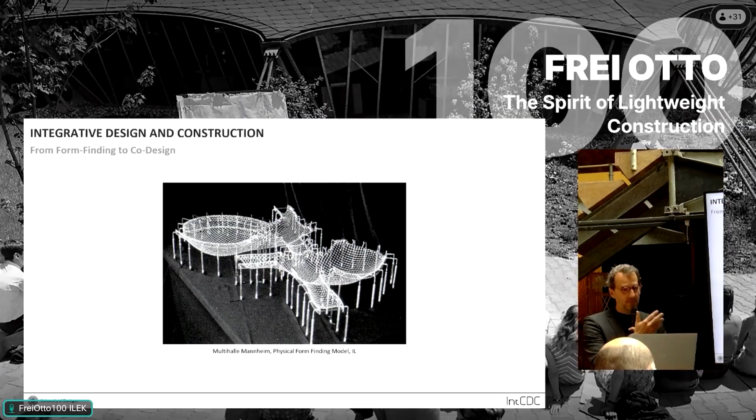I think we all agree that one of Frei Otto's most profound contributions constitutes his work on the design methodology of form finding. And of course, at that time, form finding constituted a radical departure from the design methods that had dominated architectural design thinking since the development of descriptive geometry during the Renaissance. Form finding questions the primacy of geometry and the related methods of form definition, which had been driven by the notation format of parallel and perspectival projections for centuries, thus limiting architects to only being able to design what they could actually draw. So in contrast, form finding as a design method employs self-forming processes to derive form rather than defining it. In the case of the Mannheim grid shell, the famous hanging net model that you all know was used to physically compute the shape of the building.

While it's also important to understand that there was a comprehensive digital model for the Multihalle, which was computed by the former Institute for Construction Geodesy, not the IL.

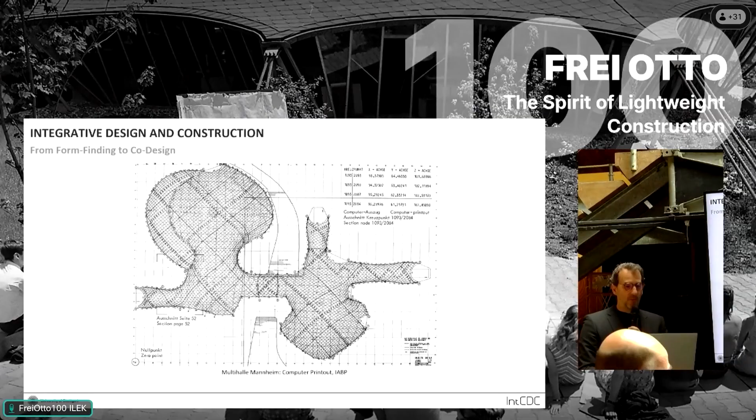The more significant relation to today's computational design can probably be found in the general definition of form finding as stated by IL researcher Siegfried Gass, who said that the characteristic form of an object found in each case is the result of the organization of matter in space, the joining of individual parts to form a new whole according to defined principles. In the organization process determined in this way, the parts find themselves in a state of equilibrium. The characteristic form of the object is the expression of these processes of formation.

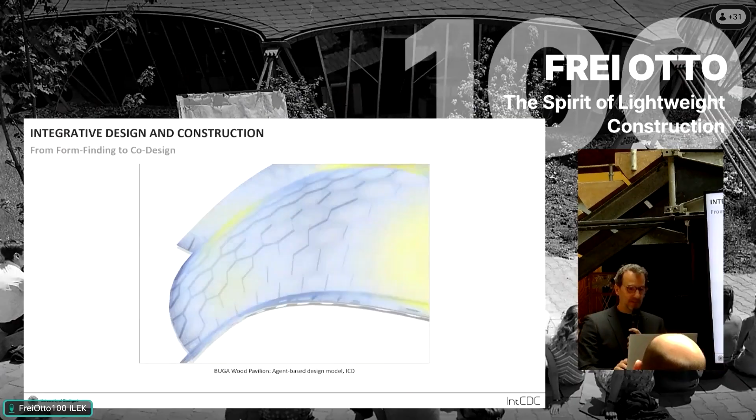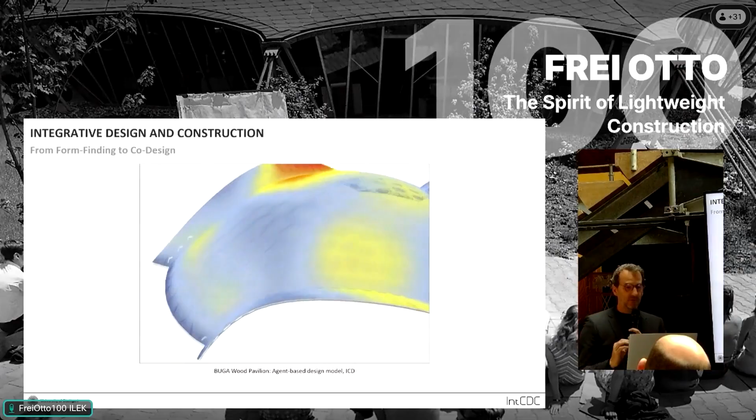Based on this notion, I think today we can again radically extend the design method of form finding towards computational form generation by expanding the principles acting on the model, by integrating multiple design and performance criteria, and by informing the individual behavior of its parts across scales. Or in short, by lending the model's constituents multifaceted agency and the capacity of self-learning in an open-ended form generation process.

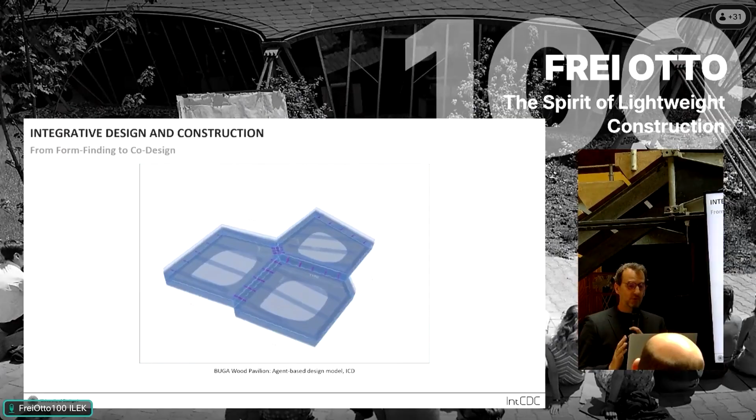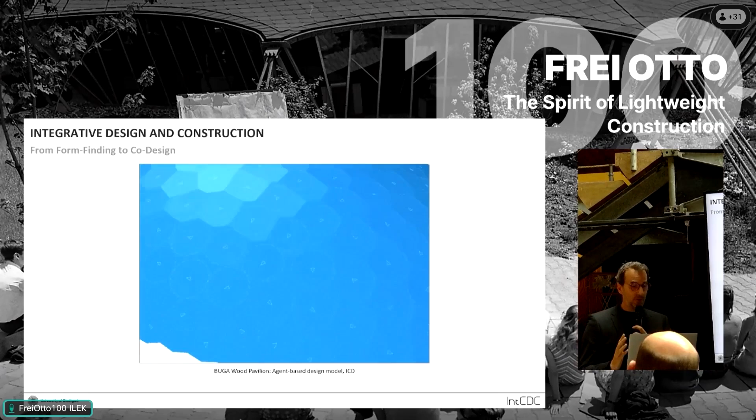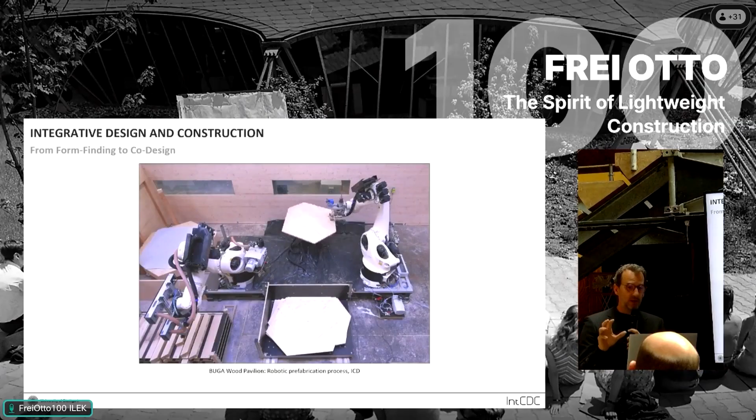I think the profound step forward here is that these design methods remain open to human design steering at any moment in time, no longer rely on predefined ordering systems, and thus generate topology, not only geometry, negotiate various often conflicting design and performance criteria, and directly integrate with and connect to new fabrication processes, which can be developed concurrently and in direct feedback with the related design methods and building systems.

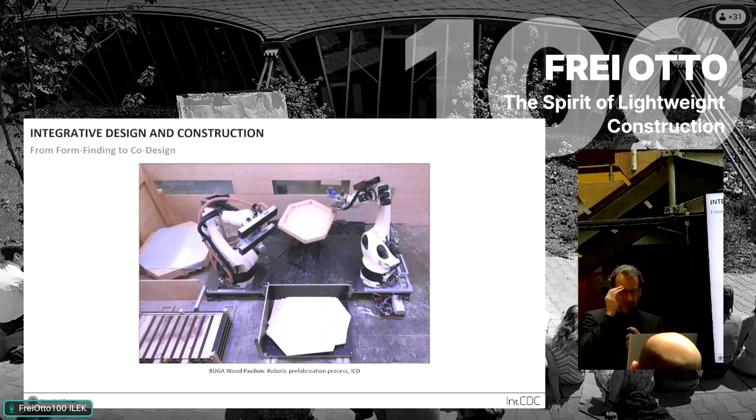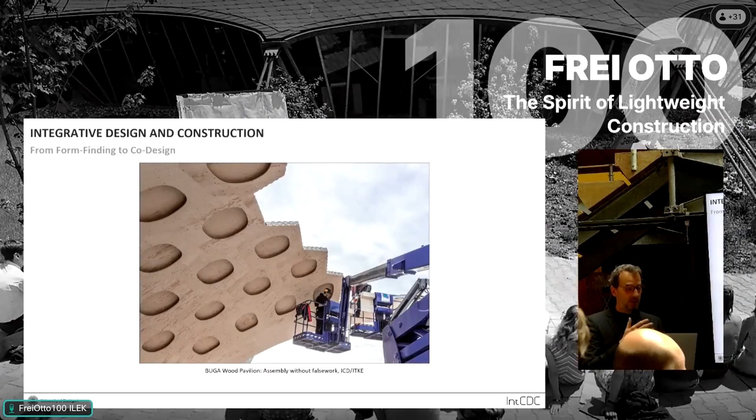So I think this enables the effective production of finely tuned, load adapted, and thus geometrically unique building elements, resulting in novel structural typologies, such as segmented timber shells, which can be assembled like a three-dimensional puzzle in space, as we have shown in the BUGA Wood Pavilion for the Bundesgartenschau in Heilbronn.

So this segmented timber shell is actually only 160 millimeters thick, spans 30 meters, is built from timber only, providing a multi-purpose event space, not only with a roof envelope, but also excellent acoustics and a unique architectural experience.

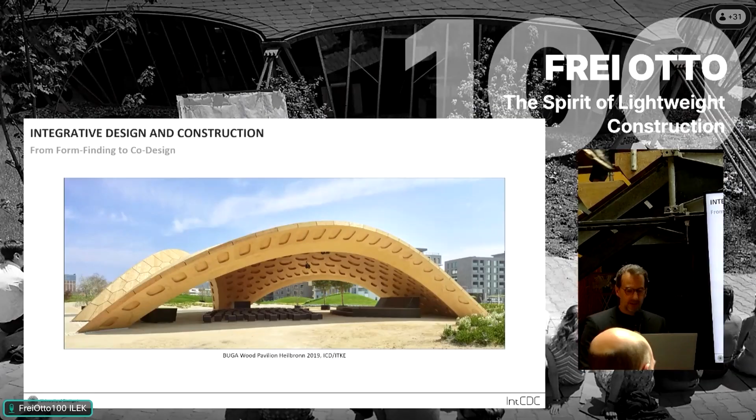In a subsequent project, which is actually a permanent building that serves as an ideas laboratory for the Cluster of Excellence LivMatS at the University of Freiburg, we were able to show that this integrative approach towards segmented timber shells not only results in a lightweight structure, in this case weighing 27 kilograms per square meter for a fully insulated building envelope, but also an exceptionally light environmental footprint, reducing the global warming potential by more than 60% compared to a standard timber building.

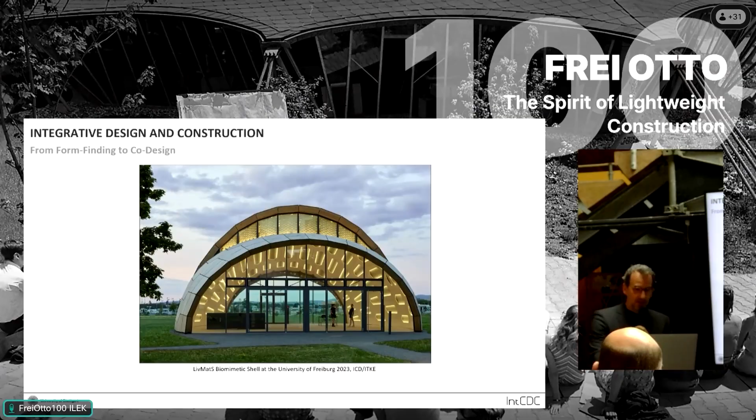So beyond form finding one equilibrium state, here the methodology of co-design concurrently advances the development of computational design and engineering methods, robotic fabrication and construction processes, and the related novel material and building systems to achieve a higher level of integration.

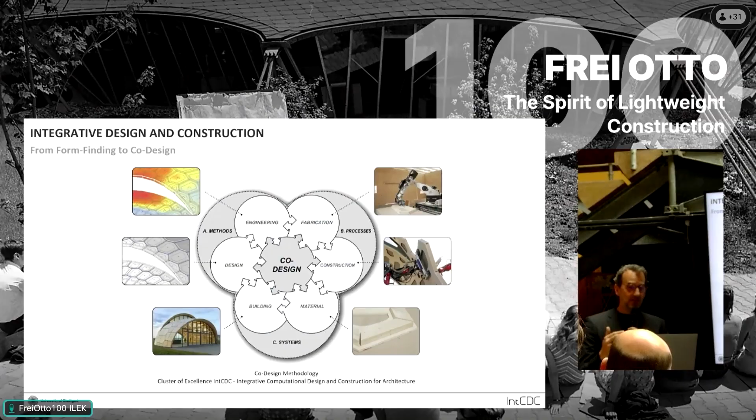In this pursuit of a higher level of integration, of course, biology can serve as a kind of concept generator. As extensively explored in the research of the Institute for Lightweight Structures, in living nature, structure, form, and materials, as well as the related material flows and processes of formation, are always inherently and inseparably integrated. It's interesting to note that fiber composites are the building systems of nature, not pneumatic structures. That's just a side note.

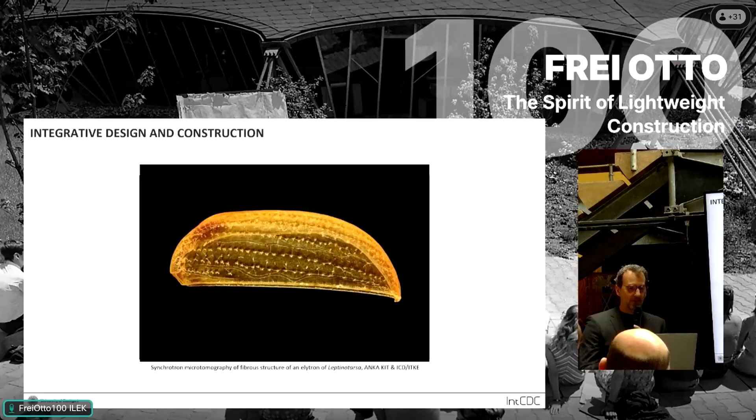Most load-bearing structures in biology are fibrous systems in which the fiber organization, directionality, and density is finely calibrated with the occurring forces. The resulting high level of morphological differentiation, the related resource efficiency, is emblematic for natural structures, of course. But it doesn't follow straightforward rules of optimization.

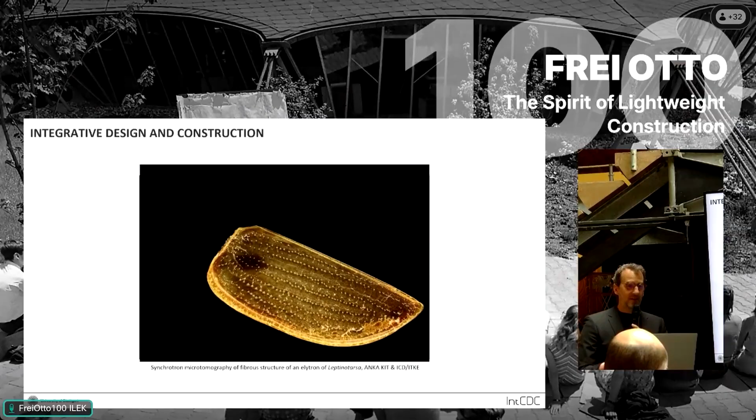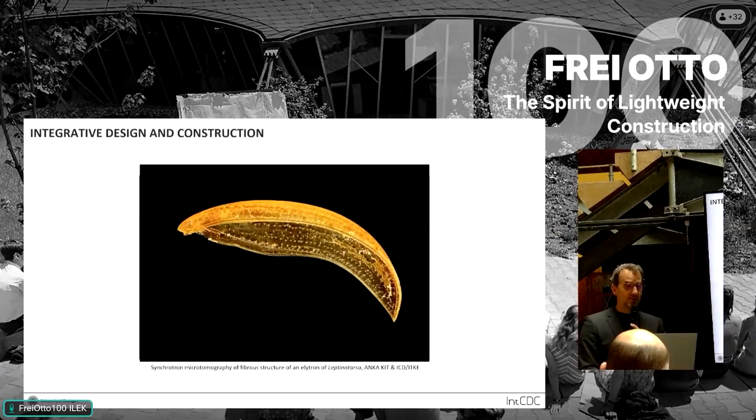And today, with the help of advanced computational analysis, design, simulation, and fabrication methods, we can explore the underlying morphological principles, very often very counterintuitive, of such fiber systems in nature and transfer them to architectural design and engineering through the co-design of related digital fabrication methods.

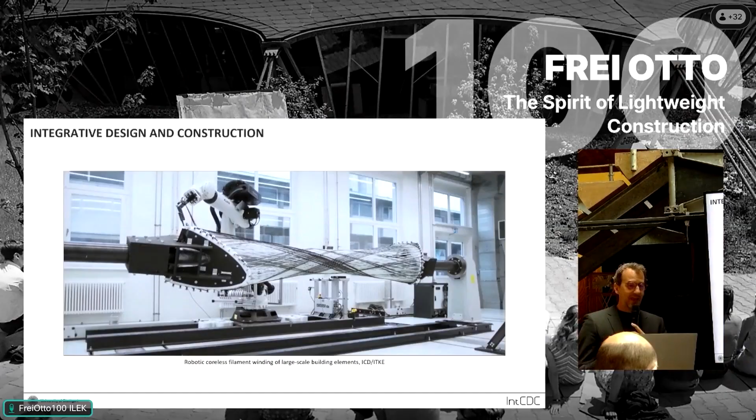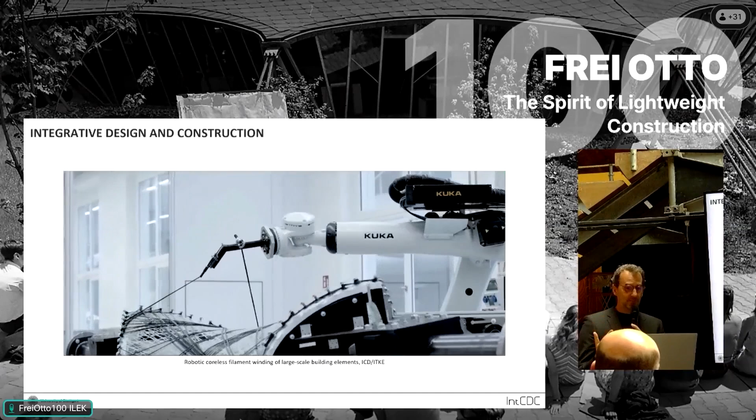So for example, as you can see here, we have developed coreless filament winding as a novel construction scale additive manufacturing process. So here, fibrous elements are freely placed between two rotating winding scaffolds by the robot. And during this process, the predefined shape of the building component actually only emerges from the interaction of the filaments and does not require any mold or core, and in this way also avoids any production waste or material offcuts.

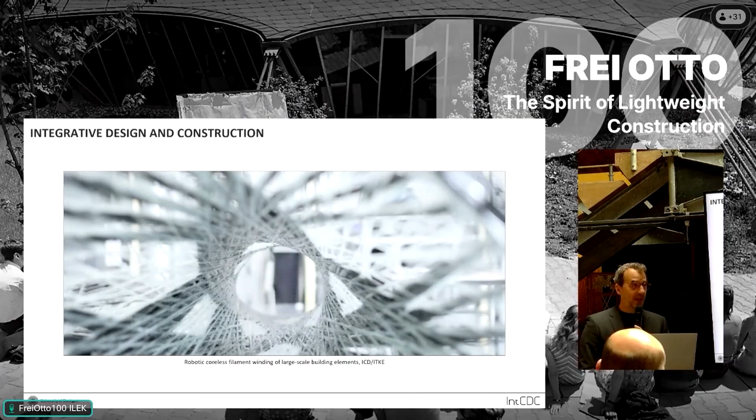So in this way, the fiber arrangement, density, and orientation of each building component can be individually calibrated, performance-tuned, and architecturally articulated, while remaining directly producible. 60 such elements, made up from more than 150 kilometers of fibers, form the primary structure of this Buga fiber pavilion, which achieves a free span of more than 23 meters and is enclosed by a fully transparent, mechanically pre-stressed ETFE membrane.

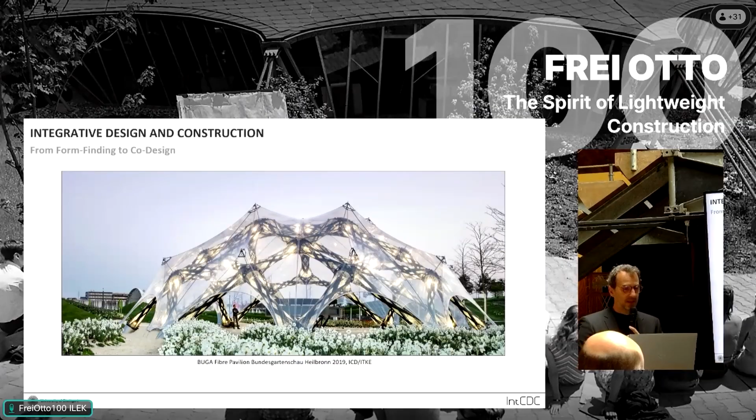With 7.6 kilograms per square meter, including everything, the pavilion is, on the one hand, exceptionally lightweight and demonstrates how combining cutting-edge computation technologies with construction principles found in nature enables the development of truly novel systems. But I think, on the other hand, it's also what one may call a genuinely digital building system. Just something that, without that higher level of integration enabled by co-design, would be very difficult to envision, design, and actually make.

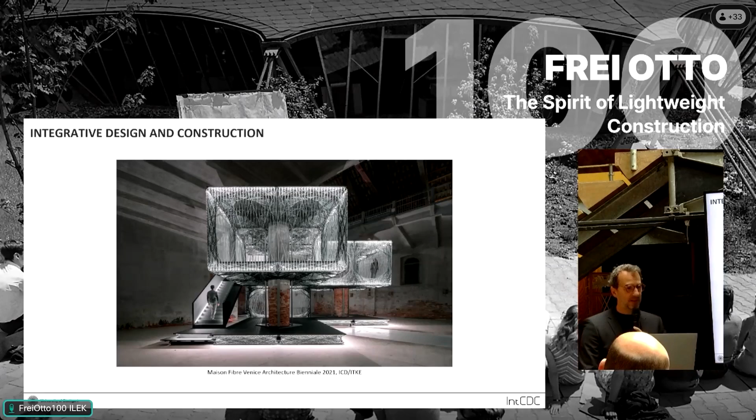We have also shown how these principles of fibrous construction can be explored in the context of multi-story systems. And for example, in our project Maison Fibre at the Venice Biennale in 2021, where all load-bearing walls and slabs were only made from fibers and offered the visitors the intense experience and spatial expression of a highly dematerialized structure, which I think points towards a novel material culture in architecture.

In recent years, we've also done considerable work in shifting from the synthetic filaments, glass and carbon fiber that was used in the Buga pavilion, to natural materials, such as flax fibers, which have actually been used for the production of linen fabrics for millennia, and also used to be a regionally available resource here in southern Germany. In hybrid structures, such as the one we developed for the Flax Hybrid Pavilion in Wangen, the fast-growing natural fibers can actually significantly reduce the amount of wood needed, in this case almost 2/3, and thus address the growing concern of the land-use trilemma relating to natural materials.

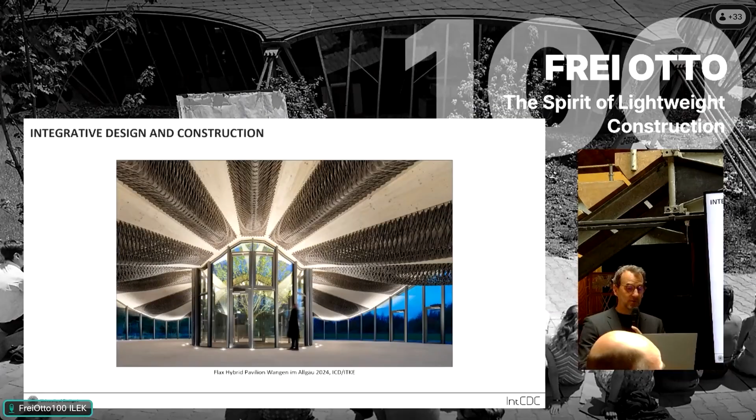I think it's interesting to note that similar to Otto's architectural work, this not only results in effective structures, but also an expressive architecture with a kind of strange coherency across projects. I think this coherency is not driven by the desire to author a particular form language, but the underlying cohesion actually emerges from the strong methods orientation and research-driven approach.

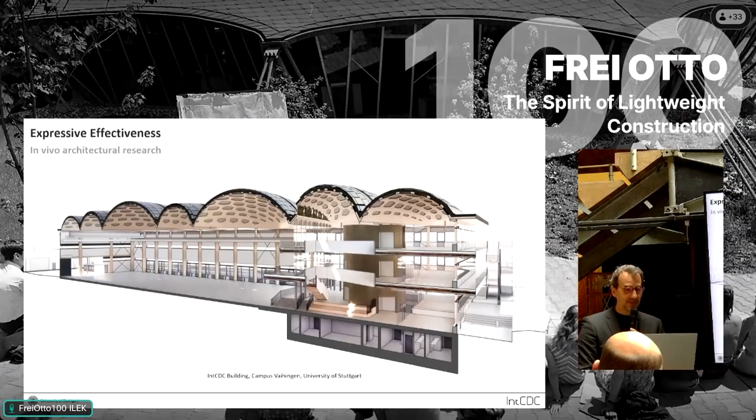In this way, we consider actually IntCDC the construction of buildings based on scientific insights as an important component of what one may call in vivo architectural research. Here, the building is not merely a demonstration or an evaluation, but it's actually a vehicle for research and concurrent two-way knowledge transfer, as you can see in the IntCDC building that will be completed here on campus at the beginning of 2028, just a bit down the road, which integrates the research of the cluster of excellence in a large span segmented timber shell roof, a novel multi-story timber building system, graded concrete foundations and slabs, as well as a large load-bearing natural fiber element.

Now, coming back to the Multihalle, one particularly fascinating aspect of the project is, of course, that form finding here was not only employed during the design stage for physically modeling the shell shape, but also almost like an on-site construction method. As we know, the entire shell was constructed as a planar regular grid on the ground and then incrementally jacked up using scaffolding towers and a forklift. So once certain grid points had reached their target coordinates, the shell was locked by tightening the bolts at each node and fixing the perimeter in place.

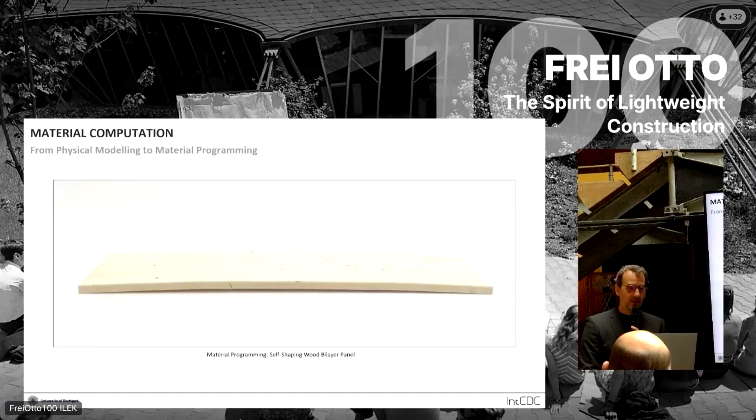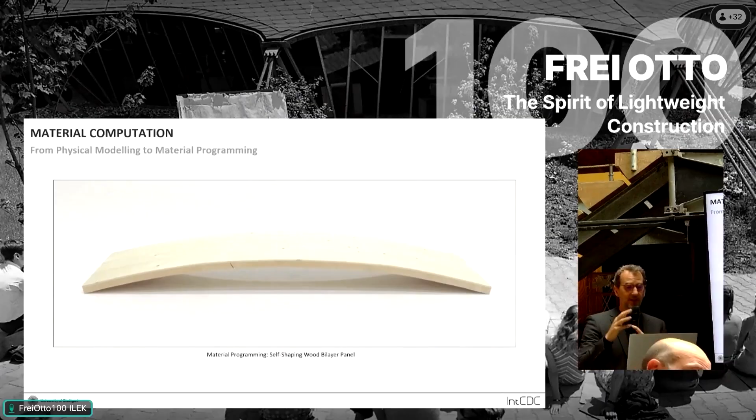Today, the methodology of co-design allows us to move beyond this still very passive understanding of the material inherent in form finding towards active self-shaping processes. So here, the material can be programmed to take a shape entirely by itself. For example, here you can see a simple, straightforward spruce wood bilayer panel that is materially programmed, in this case, through the differential moisture content and fiber direction of the wood lamella to take on a predefined curvature during a drying process. It's absolutely regular timber.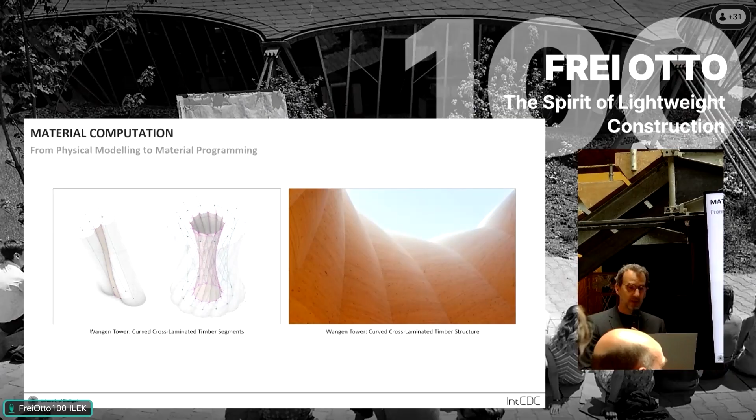This method of material programming actually works really well because it leverages the hygroscopic properties of wood, and it works well on a construction scale. As you can see in these 23 meter long, curved, cross-laminated timber segments, which were produced in exactly this way, constitute the load-bearing structure of the Wangen viewing tower that you can see here. So the load-bearing structure is only the 130 millimeter double curved, single curved timber strips. So the resulting global hyperboloid shape and the local three-dimensional corrugation results in both a novel, highly resource-efficient timber structure and a distinctive architectural experience while climbing through this vertical timber tunnel towards the transparent viewing platform.

The on-site form finding of the Mannheim Grid Shell was certainly intellectually beautiful, but it also exposed some of the profound limits of that method. In line with most other engineering methods, form finding is profoundly based on an idealized understanding of materiality. Materials are considered to be homogeneous, and their real-world characteristics are expected to perfectly match their abstract textbook properties.

While this may be the case for highly engineered and industrially produced materials, typically with the downside of high embodied carbon and energy as a consequence, form finding as a design method struggles to deal with the material variability inherent in biogenic materials, which Otto's team experienced firsthand in Mannheim. Actually, for the timber shell, initially the use of regional wood was considered, but after serious difficulties of achieving consistent and reliable bending due to the material inconsistencies and related breakage, long, consistent Western hemlock battens had to be imported from North America.

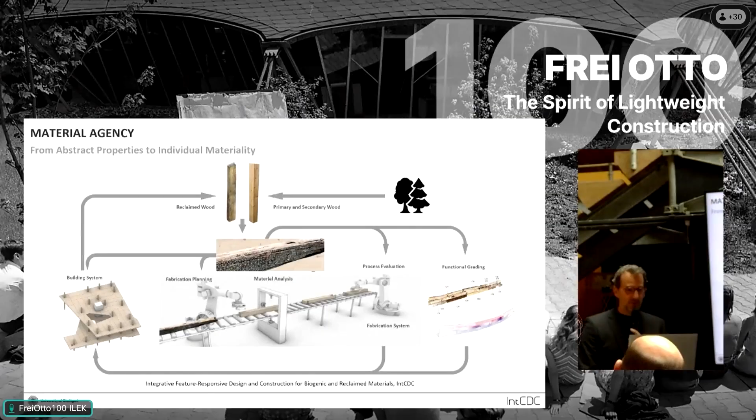Before coming to an end, I will spend the last 3 minutes to highlight 3 other points, because I think it was not only Frei Otto's work that was visionary, but also his way of working. In today's frenzy for immediate innovation and direct impact, which I think is a syndrome of our scientific community, it is humbling to see how long the development of some of Otto's ideas took. Even if you just focus on the research demonstrators of timber grid shells, it took 13 years from the first prototype exhibited at a German building exhibition in 1962, the less known grid shell under the German pavilion's tent roof, to the construction of the Mannheim multi-hall.

And I think it's also equally humbling to understand that despite the astonishing idea, the resource efficiency and the structural beauty of timber grid shells, only a handful have been realized since 1975. This is still the biggest one. So the real impact here in my eyes is not the structural typology, but the pioneering methodology which influences design and engineering thinking to this day.

Probably even more importantly, Otto's Institute IL created new constellations of actor networks in architecture, engineering, and construction. While for many buildings that today we refer to as Frei Otto projects there was always a specific architect and engineer, his kind of middleman role as a creative driving force and lateral thinker had a decisive impact on the project outcome. And I think this is the important point: it forged new collaborations across architecture, engineering, and natural science, which still constitute the roots of the unique interdisciplinary research culture at the University of Stuttgart that still thrives today.